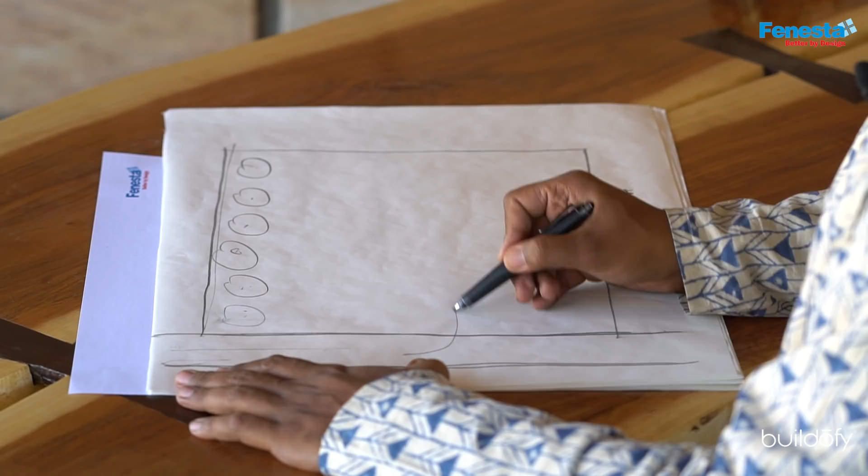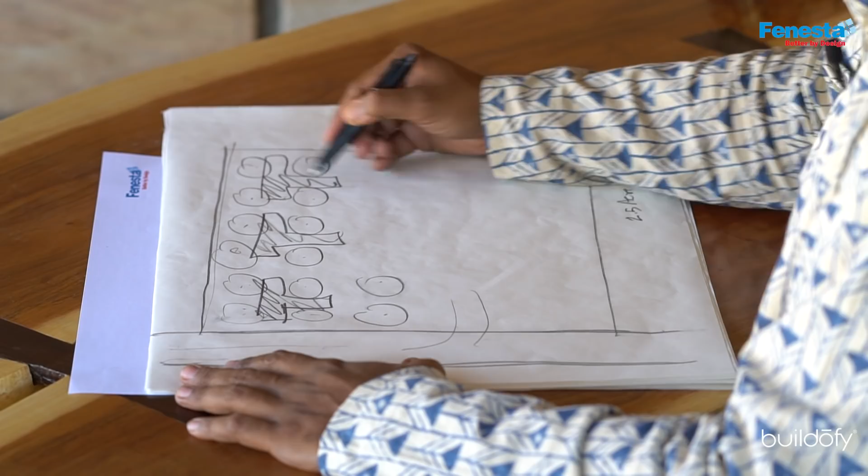So from here, the moment we approach, the client wants to build 6 cottages, and we have placed all cottages on this periphery. So these 3 clusters have a total of 6 cottages. One cottage is roughly 500 square feet in area. Apart from these cottages, we have a reception area, one large dining hall, as well as one dormitory. Total built-up area comes to around 6,000 square feet, and the whole total budget was around 60 lakhs.

So if you see, it comes to 1,000 rupees per square foot. Even our normal houses come to 1,500 rupees per square foot. Within very few resources, within a very limited budget, we can create fantastic architecture.

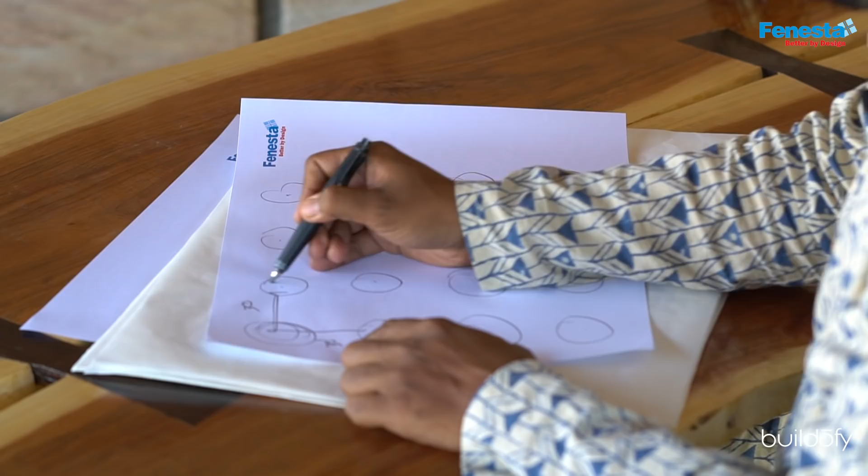The site is basically a mango farm with a grid of mango trees placed at 30 feet by 30 feet. We have to design a cottage within this space. So this is actually a very narrow space with the foliage. If you consider the foliage of this mango tree, we are left with only this space, which is not more than 15 feet wide. So then we decided, rather than chopping trees, we will place our building in a linear form like this, and then

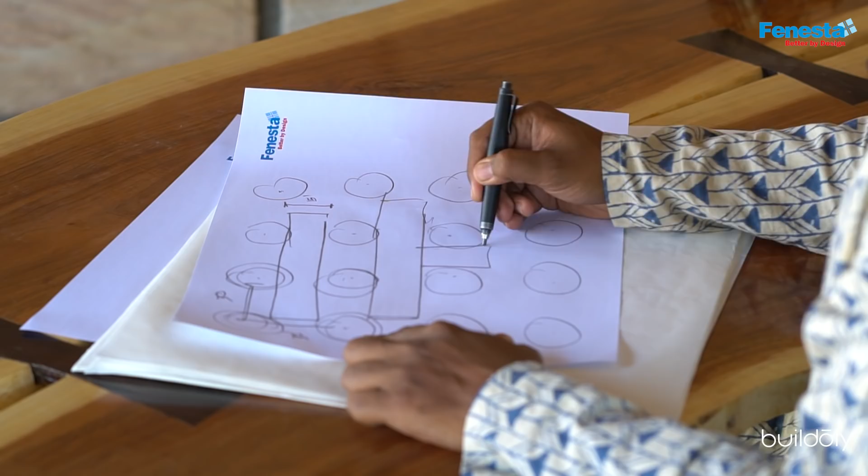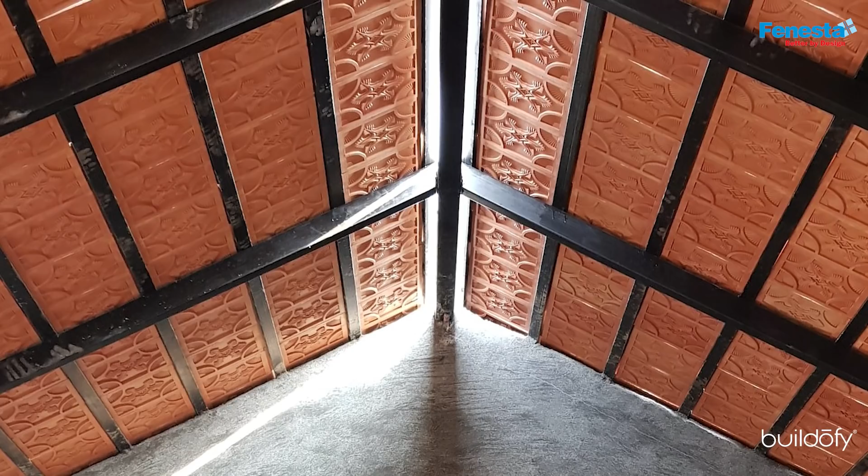extended the roof over here. We have taken a very simple rectangle form with a pitched roof, which is made of terracotta. In India, more than 500,000 villages are built with this same material. This material is not only proven, it is also associated with our culture, as well as climatically very relevant.

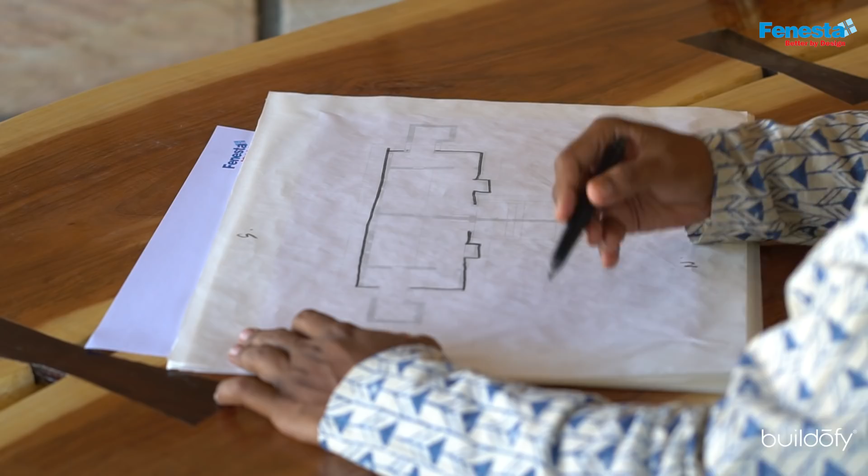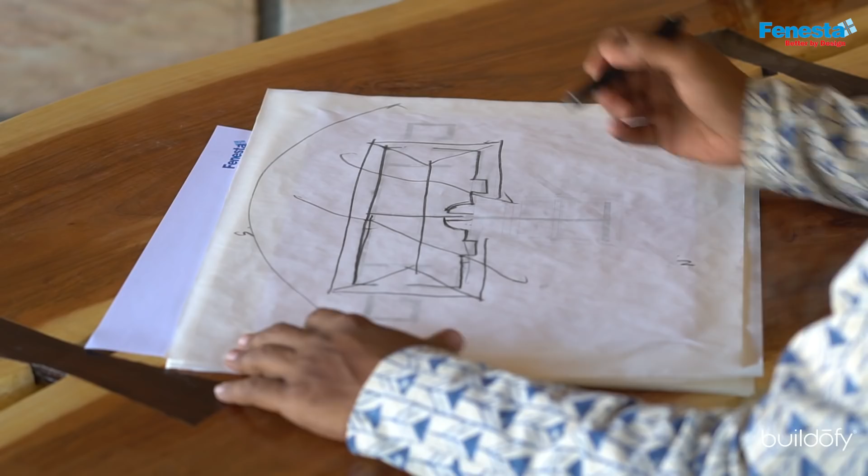So this is a rectangle space. The maximum part of the building is oriented north-south to minimize the heat gain, and our ventilation is placed here, so the cross ventilation will work easily. Now this is our entry of the cottage. So to create a privacy visual barrier, we have just extended this roof up to the ground, so that from outside no one can directly see into the bedroom.

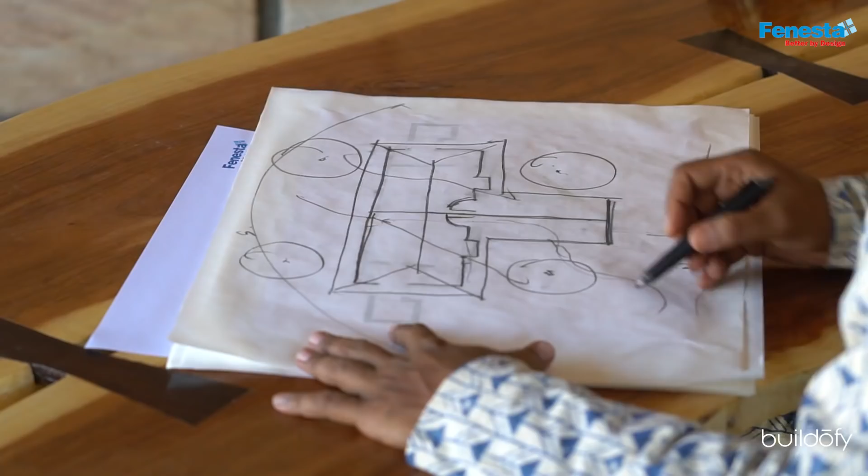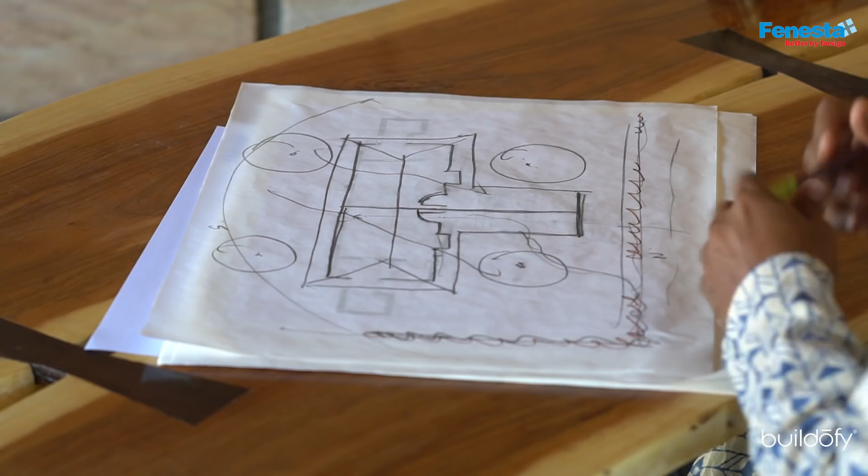So now when you enter the resort, you will see an elongated roof trying to touch the earth. This is your open farm, and we don't have any kind of barrier here. We have created shrubs just to create a sense of entry. You enter from here, and through the trees you reach an entrance foyer. This whole space is very narrow. If you see, you have to literally bend down and come into the bedroom space.

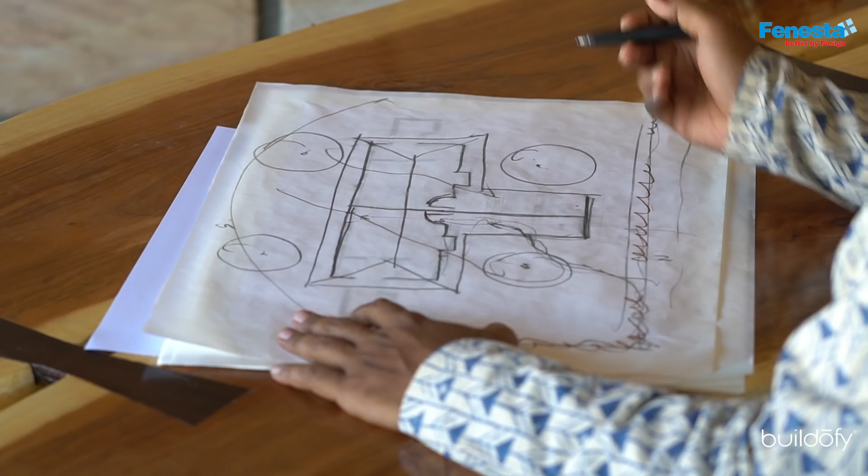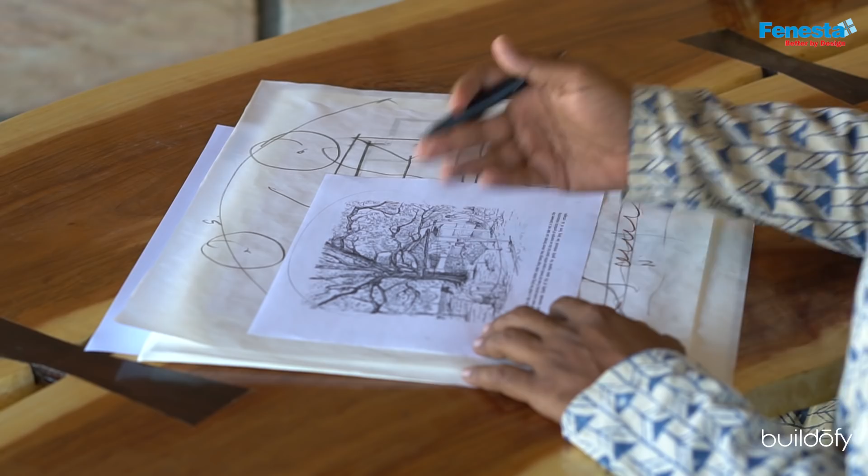So during brainstorming on site, I found a large mango tree, and below that there is a shelter made by a farmer. I found it a space which is an example of the symbiotic relation between nature and human. It's like a space within a space, and this feeling I somehow want to get over here in my resort. This prolonged roof is helping me to achieve that feeling.

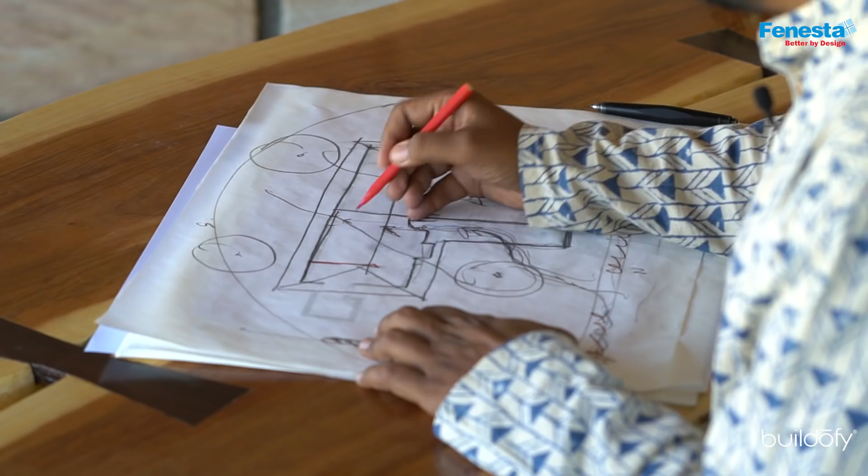See, the entire context is a lion sanctuary. So outside you will feel a certain vulnerability, but the moment you step into a cottage, you will feel very cozy. So this is my bedroom area. This is my entry. The toilet is also divided into two parts.

This one part is a dry space, WC as well as basin area, and this part is a shower area having a dome on top of it. This dome also has a natural skylight, so the whole bath space is lit. This is a normal section of a cottage.

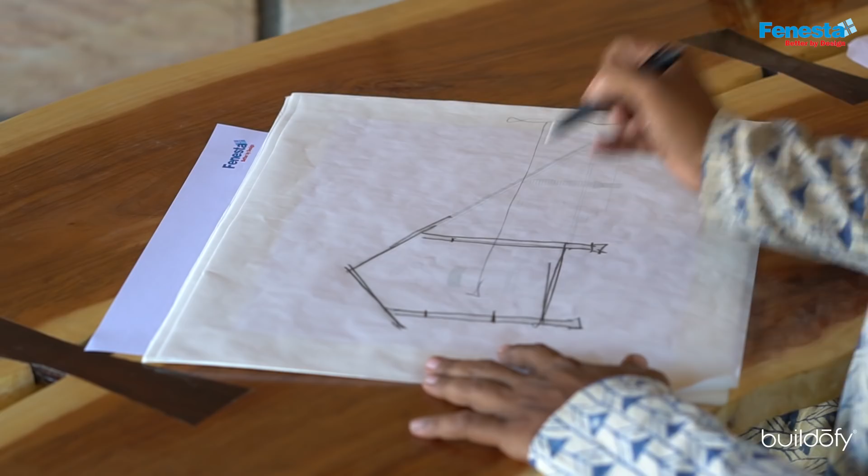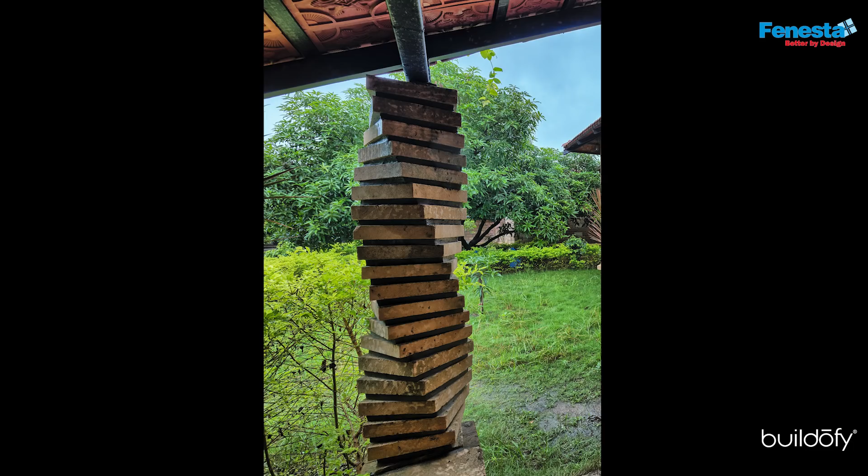So this is the form which generally we see in our villages. From outside one can see directly into a bedroom. So to restrict that vision, we have created this roof up to here. And this roof is again supported with a spiral column at this side with inbuilt sitting space.

After that, we have created a puncture over here in the roof. So this is a landscape space, and creepers will come out, and over the years this entire roof will be covered with these creepers.

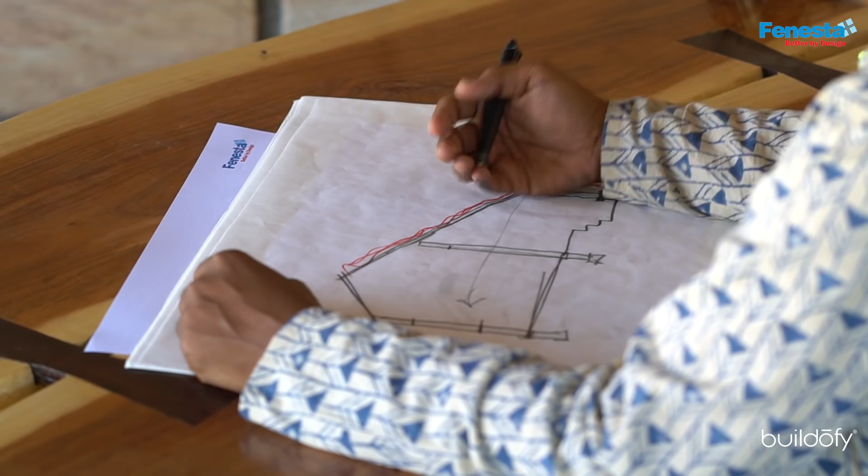We don't want to create a building which dominates the site. So we have intentionally designed it very low. Since this whole area is an earthquake prone area, we have used an RCC band at plinth level, that's it. After that we haven't used RCC anywhere.

So this whole building is made with locally available material, which is bela, a sandstone. You can easily find it in the whole Saurashtra region. The second material is of course clay tiles, terracotta. And the third material is of course brick. We have made a dome out of brick.

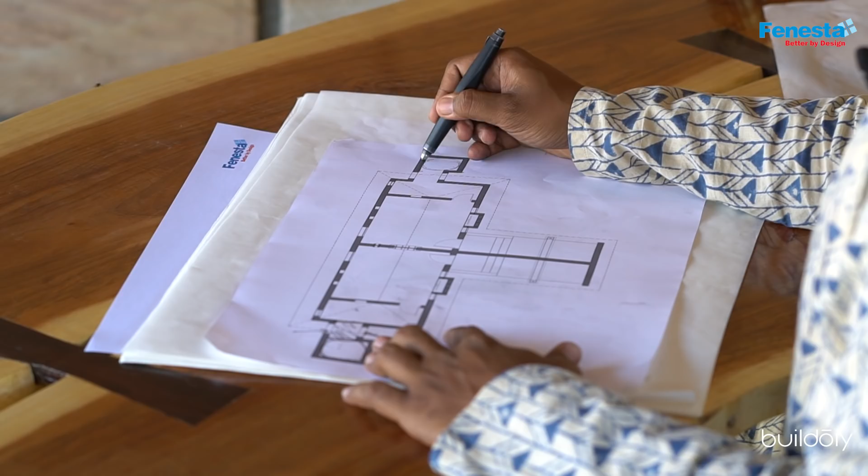So again, this is very interesting, how to create a dome without RCC. From the square form, as you will see in our historical buildings, the square converts gradually into an octagon, and from the octagon we convert it into a round. So this is how we have made a dome without any kind of reinforcement.

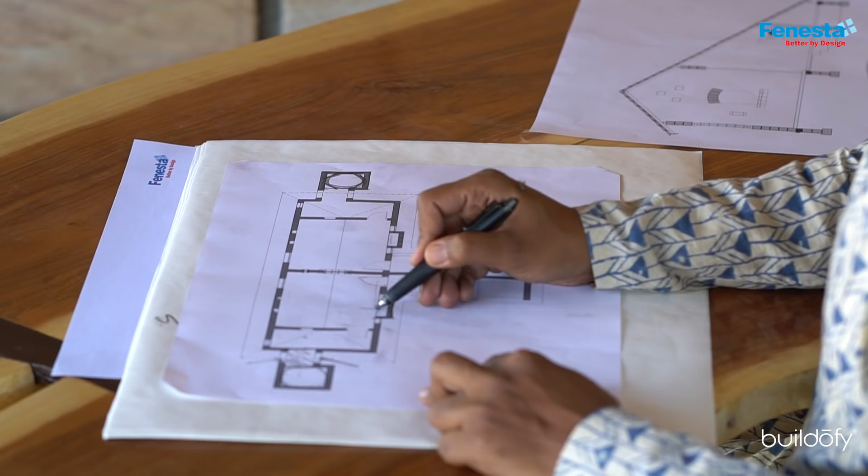Another interesting thing about this project is we haven't used RCC anywhere as a lintel either. All lintels are made of stone slab only. Then we have created a lot of niches within the 9-inch wall. You will see this whole bedroom has small niches over here and here, and this one big niche for the TV. Now without RCC, how to create such niches, that is also a challenge.

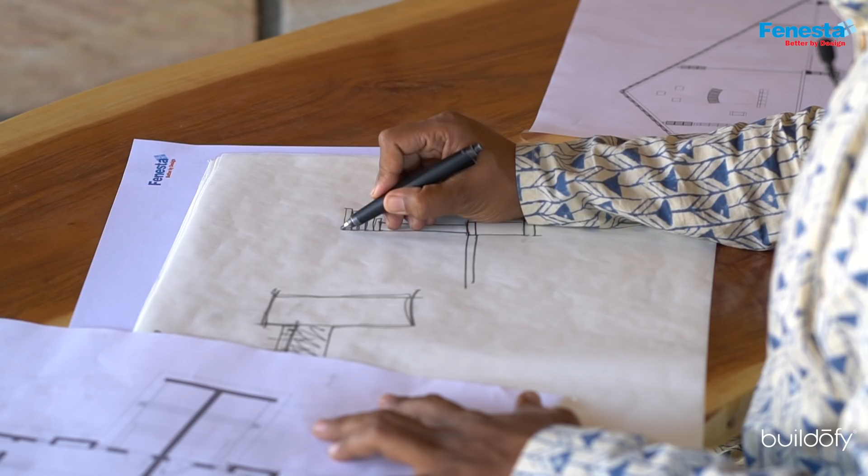So what we have done is, this is our 9-inch thick wall with 14-inch plinth. Now from here we have used sandstone slabs and created a niche by a simple corbelling method. So this is how we have created niches. All doors and windows are made of locally available wood.

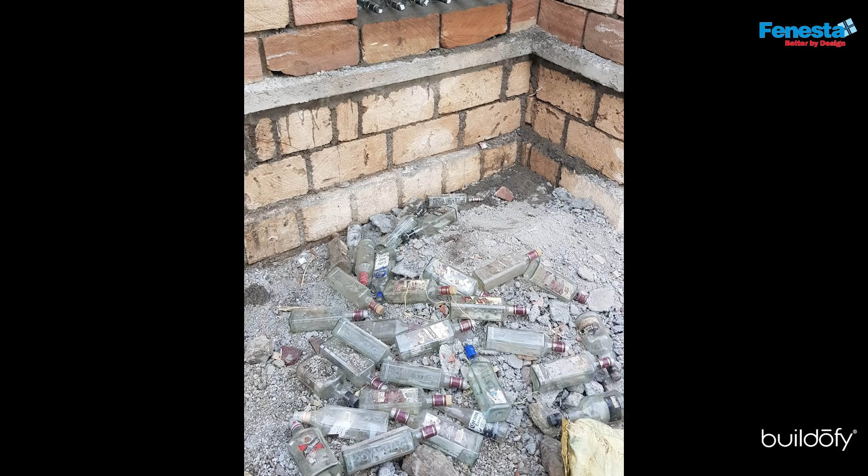Whenever I went to the site, I found a lot of glass bottles. So I thought how to use them. Since my budget is very limited, I came up with an idea: let's build a small wall out of these glass bottles. So this is a transition area between my bath area, which is wet, and this dry bath area.

This wall is made with glass bottles; we have simply put them in and filled it with normal mortar. Since it is on the south side, it filters very interesting light into the bathroom, and of course one small element as a dome. So these are the small elements which we should carry into our design.

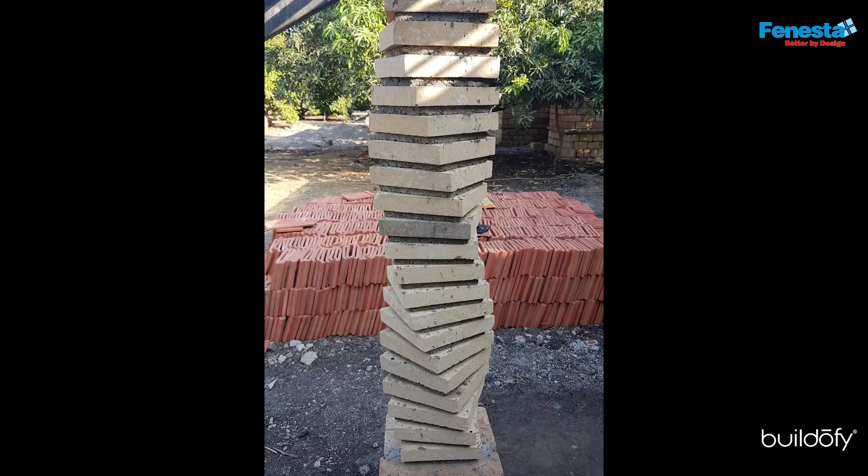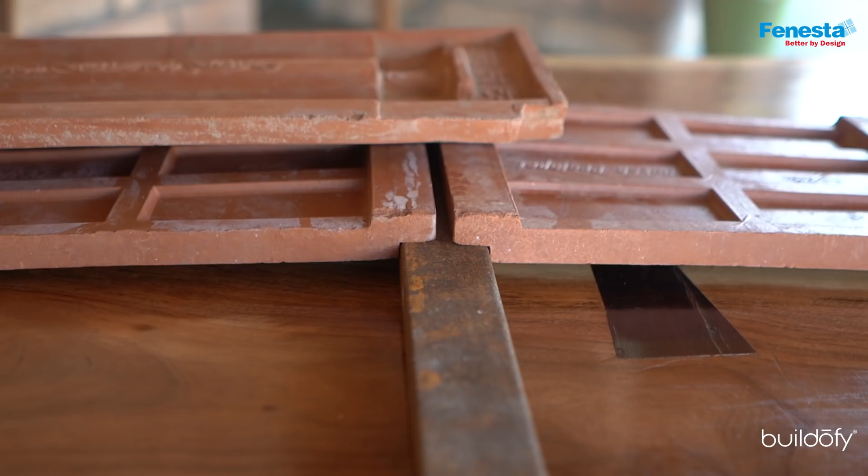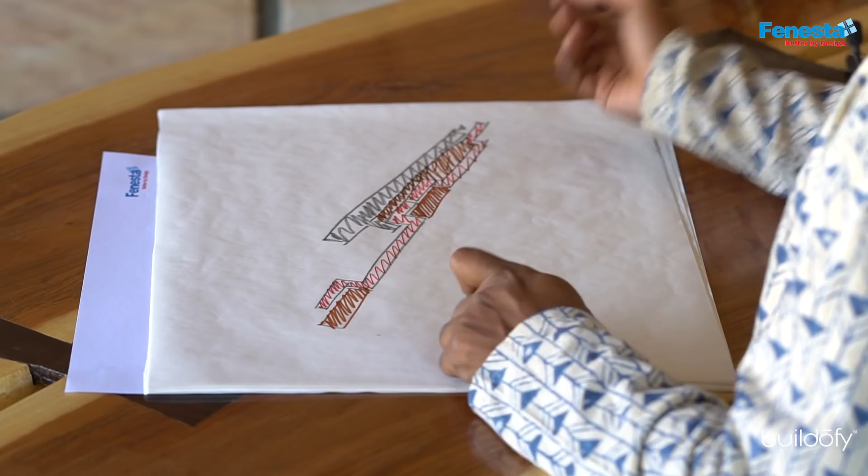We have tried to create a spiral column with papada stone, which is 2-inch thick, of the same sandstone. So this is our ceiling tile. It will be placed on a metal purlin here, and on top of it my Mangalore tile will come. This creates a cavity, and this cavity helps to reduce heat gain. So from inside you will also see a nice flush ceiling tile. You don't need any false ceiling.

We have created sit outs as well as furniture like the bed out of locally available stone only. So this is also another way to reduce your expenditure. It doesn't make sense to create a green building using a lot of money. Very few Indians can associate with that kind of building. We should come up with buildings with a very simple approach. Mother Earth has enough for everyone's need, but not for everyone's greed.